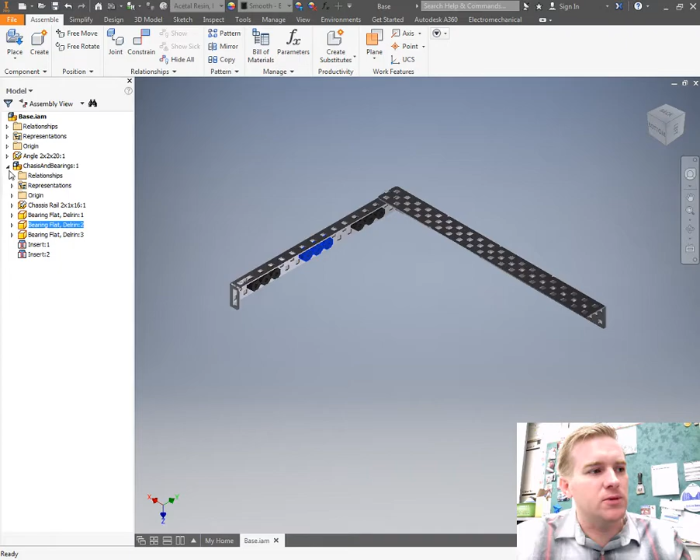I'm going to delete this part by pushing the delete key. Then I am going to place a file in metal, which is going to be my chassis rail, downloaded from Google Classroom. I renamed it 2x1x16R. I'm going to place that chassis rail.

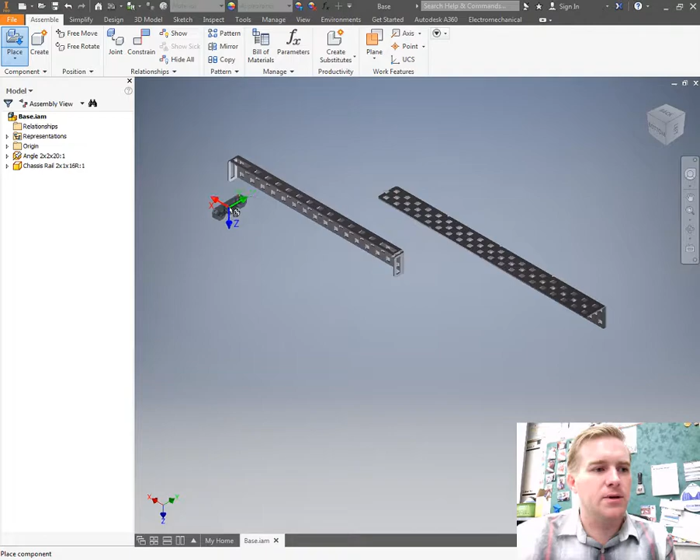Then I'm going to place bearing flat, which is in other parts in your parts folder. Double click on other parts, scroll down until you get to bearing flat Delrin. Click on that and open it up, then place 3 of those. Click OK. After that, you're going to attach these to your chassis rail.

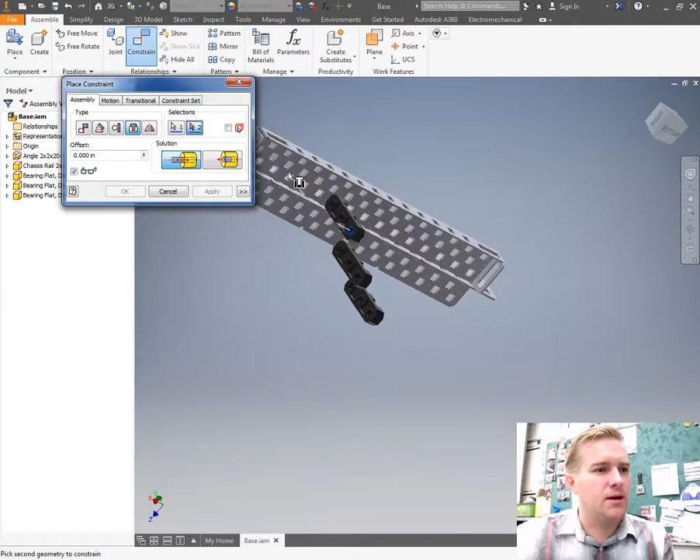Click on the Constraint tool, insert constraint, and I use this circular surface. I am going to place that according to the PDF on how to build a Clawbot in Vex. Click apply, exit this, scroll down. Notice how that other part moves? That's because it's not grounded. We don't need it grounded right now. We're going to attach it to this frame, this angle right here, which is grounded.

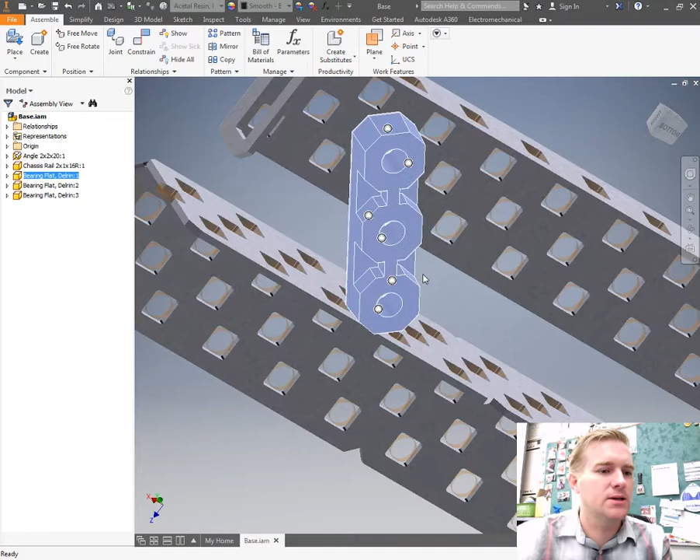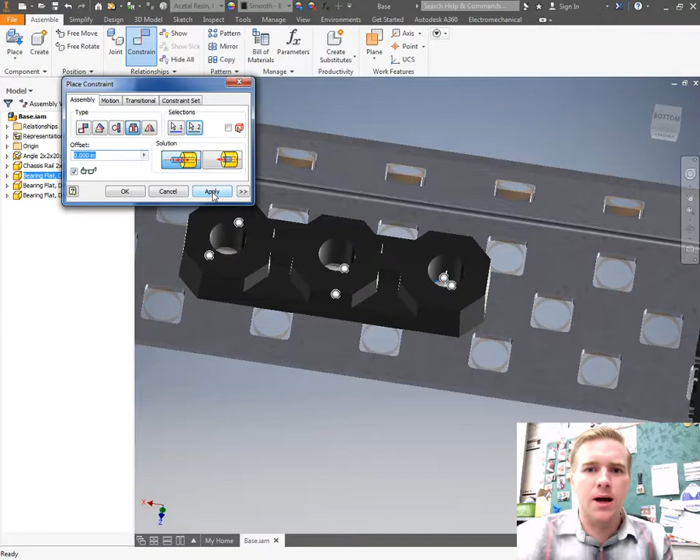Next, click on Constraint, insert constraint, and scroll around to find that rounded surface again. Because it's 3 holes wide, we need to place it on the outside right here, as you can see. Click apply, and then we go to the next two.

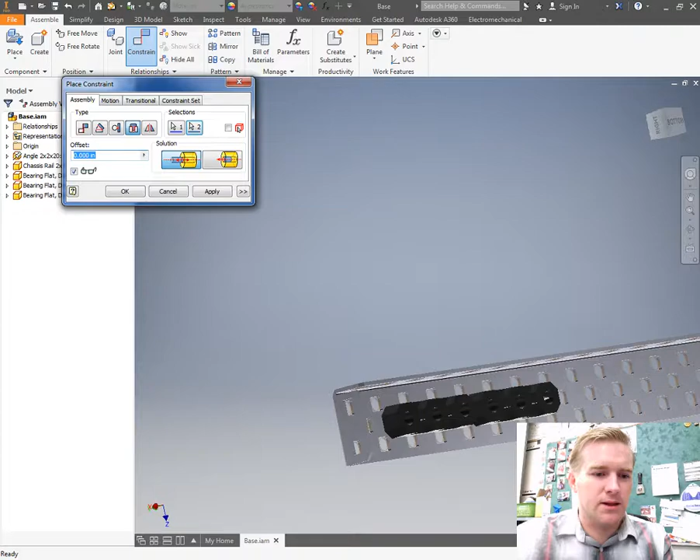Now I'm going to move a little faster since you saw how I did the first one. All it is is placing it in the right areas. I'll click on Constraint, or use C on my keyboard, and constrain it right there. Apply, cancel out, roll this around, C, and constrain it right here. Insert, constrain it here to here, hit apply.

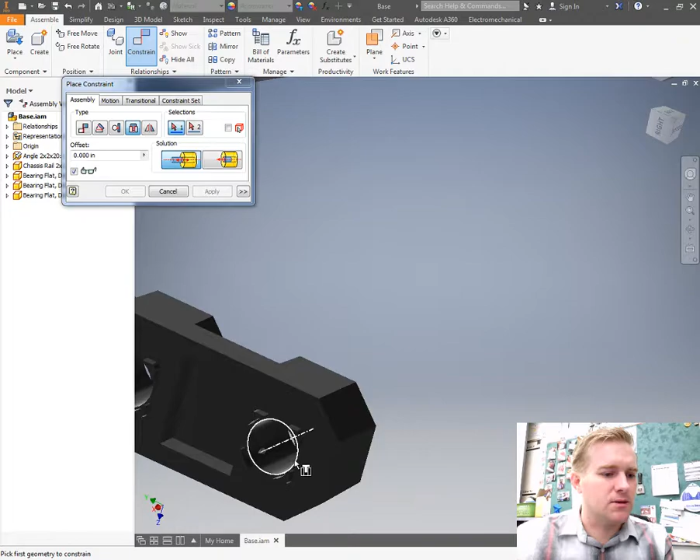Now do the last one here. Scroll around, click there, apply, click there, zoom in, click there, apply, and those look good.

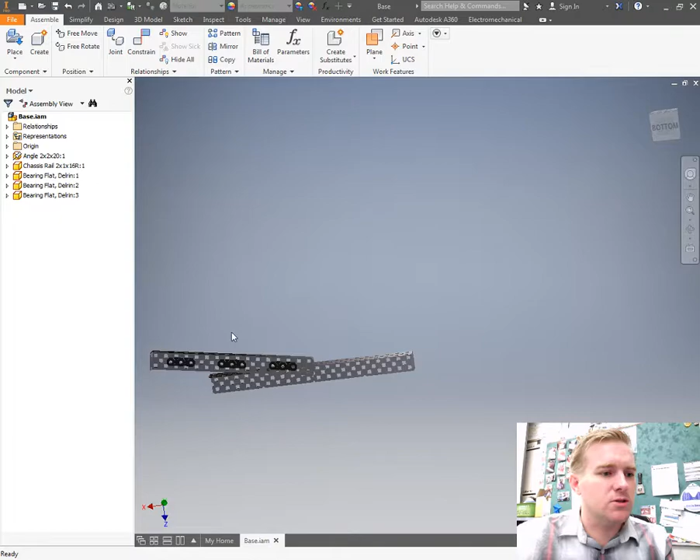Now I need to demote this part, so I'm going to cancel out of this, highlight everything selected in the browser window, and push tab on my keyboard, or right click, go to component, and click on demote. After you click Demote, you want to name this, and I like naming it with the part names I connected, so I'm going to say chassis and bearings.

I'm going to say outside chassis and bearings, because we'll have the outside ones which have bearings in different areas, and then the inside ones which you'll need to demote too. Then I'm going to pick my folder. In my home folder I have parts, and I also named a folder called assemblies. Double click on assemblies, and I'm going to save my chassis and bearings there.

Notice that I already have it saved there, so I'm just going to save over it. You guys do not have it. Let me see this - oh, I called it outside. I'll call it outside chassis and bearings. Save, and OK, so that'll replace my outside chassis and bearings.

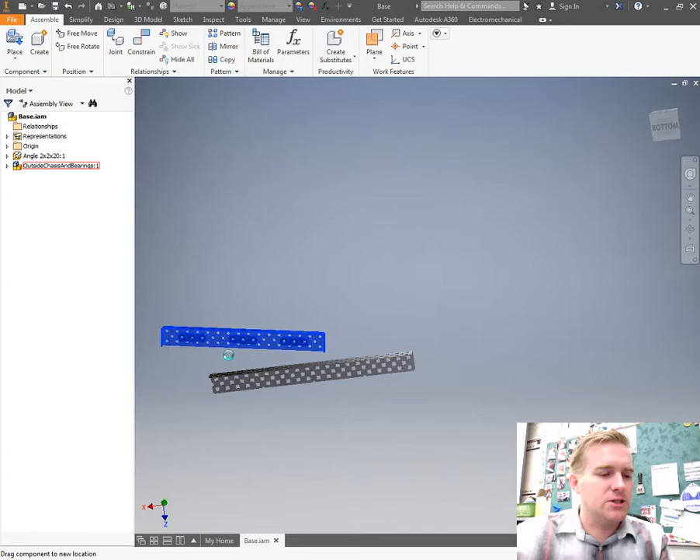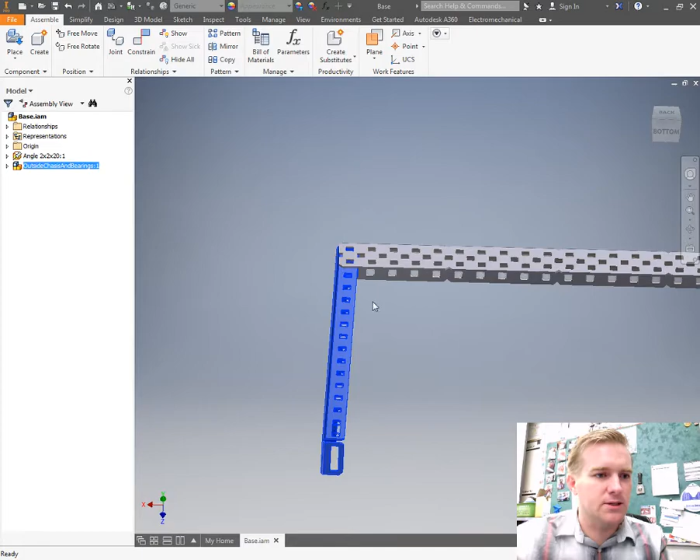Now I'm able to attach that again. Let me go to Constraint, insert constraint, and grab this outside surface and the inside surface. Hit apply, exit that, scroll out. Notice that that one's attached or grounded now, so it doesn't move. Then hit C, constrain the inside here with insert constraint 1 and 2, hit apply, and then you're good to go on that one.

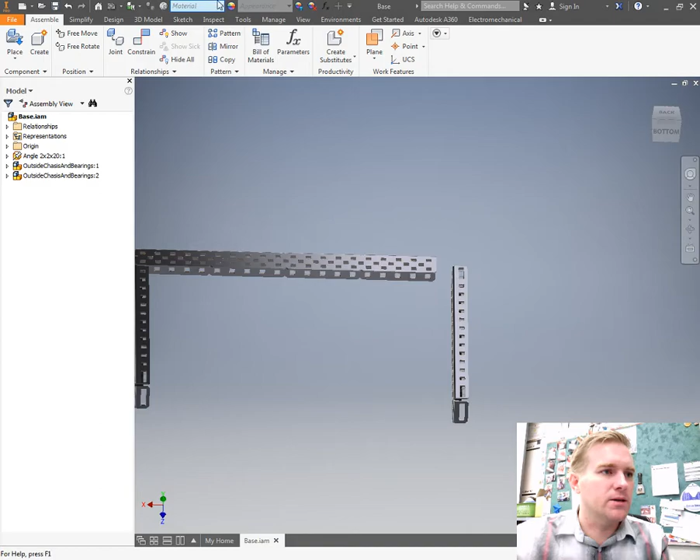Now I can make the other outside one just as easily by clicking on this, Control C to copy, Control V to paste, and now I just need to swing it around and attach it right here. So I'm going to go to Constraint, Insert Constraint, click here. Lost my place - here, go back to Home, and then click, it's the outside there, so I'll click right there. That'll snap it into place.

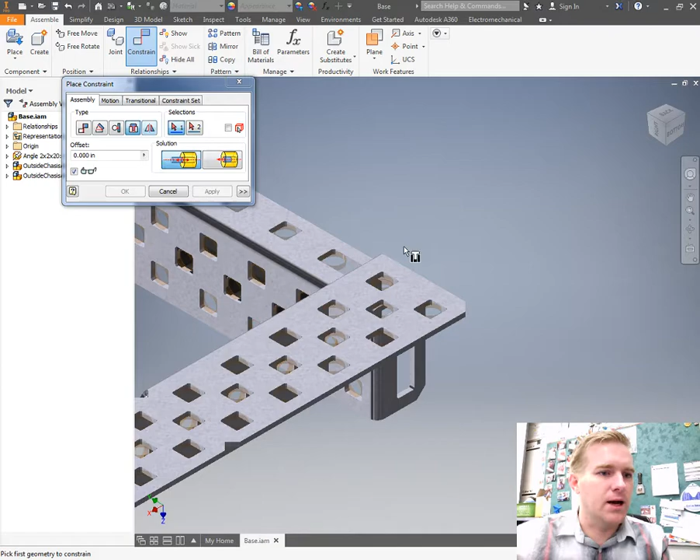And then do these two. So the last insert constraint is right here and here. Hit apply, go back to your home window, and you can see that your base is beginning to take shape. That's really nice. Alright, I'll see you in the next video.